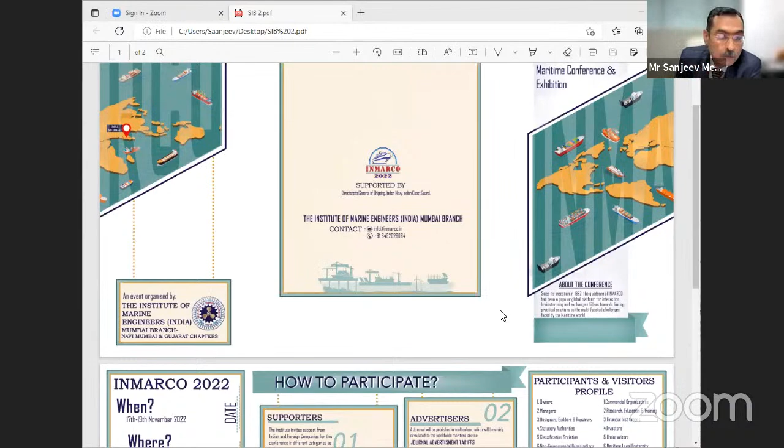INMARCO basically started in 1982. It's a quadrennial event, and it's been a very popular global platform for interactions, brainstorming, and exchange of ideas. This is happening in November, from the 17th to 19th, at Hotel Sahara Star. The theme for the event is Evolving Maritime World for Greener and Sustainable Future.

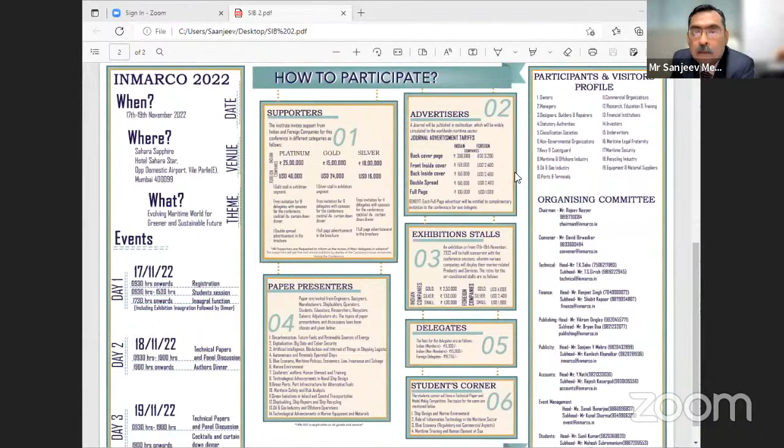Very good evening. We at Kenmark Tech Solutions have a quality policy, and I'll read it out for your benefit. First, to be the preferred service provider of spares, repairs, and overhauls for ships, machinery, power plants, and industry. We endeavor to satisfy the needs and expectations of customers consistently, ensuring regulatory and statutory requirements are fulfilled in all aspects of our service. We will at all times adhere to the quality management system and its requirements, and will monitor and continually improve its effectiveness in all aspects of business.

The important thing is the ship must keep moving. If the ship stalls, the complete related industry will collapse. This is the high point of our Kenmark.

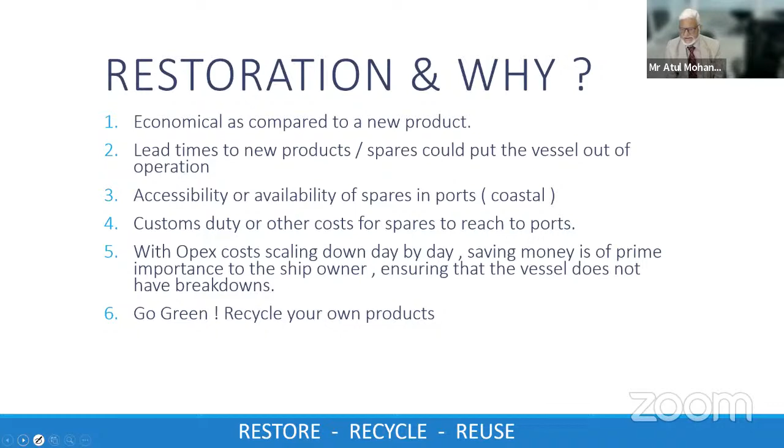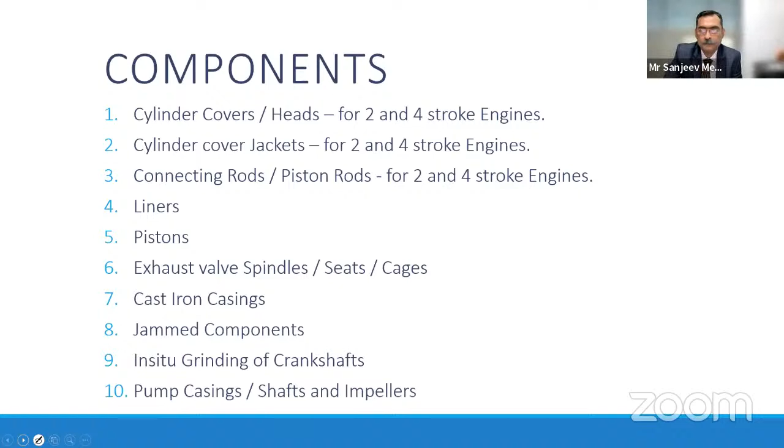These are the type of components we are able to attend to in our workshop: cylinder covers and cylinder heads for both 2 and 4 stroke engines, cylinder cover jackets again for both 2 and 4 stroke engines, connecting rods and piston rods for 2 and 4 stroke engines, liners, pistons, exhaust valve spindles, seats and cages, cast iron casings, and jammed components which we receive quite often in our workshop. We also do in-situ grinding of crankshafts on board ships, pump casings, shafts, and impellers.

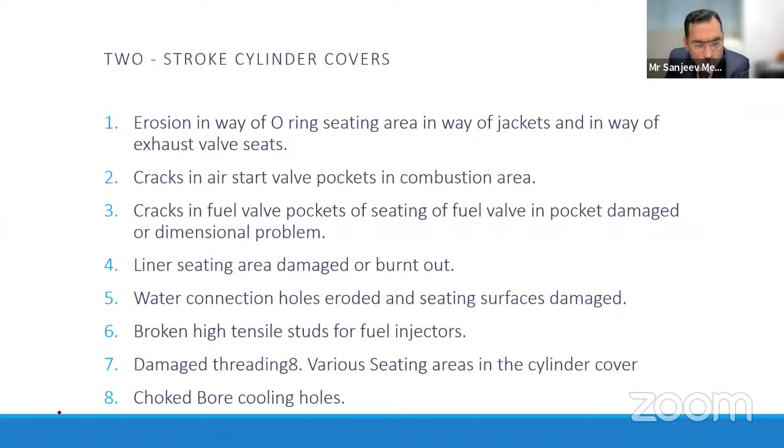So here are some photographs. I will try and take it along of what all we are facing here. So here you can see seating areas are damaged. Here you have damage in the O-ring grooves. This is absolutely worn out here. These are cooling connections, and this is basically your threading holes for the studs.

In the combustion area, you can see where the fuel injector comes out. There's a big crack here. The cladding area, this is a cladding area here which is damaged, which is eroded. This is fuel valve pockets with lot of lapping, lot of emery being used. The sizes get distorted, so you have a lot of problems here, or you have cracks in them.

These are peculiar to Wärtsilä engines. You can see cracks because Wärtsilä has got bore cooling, and a very peculiar problem with these heads. The thickness is in the range of about 20 millimeter, and normally you will have a lot of problems with Wärtsilä cylinder heads. So here you can see we do a regular testing before we send it out to the client. We test the wall thickness, and if it is less than 16 millimeter, for an RTA 52, then we do a complete reconditioning job on this.

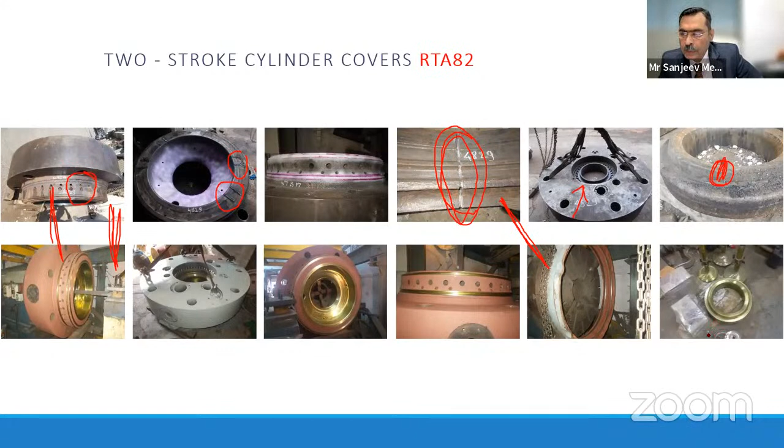The below row is basically the jobs which were finished, before delivery to the client. So this is how you can see before and after photographs. And even we managed to repair the jackets. Normally cracked jackets and jackets in two pieces are difficult to repair. But if you don't have spares and the ship has to move, then you have to do something. So we managed to repair and the vessel sailed out. So that was good, the client was very happy with that. So this is also before and after. You can see the seat on top and after restoration on the bottom side.

So bore cooling is what we spoke about, and you can see here the bores which are badly choked. You can see a lot of rust inside and a lot of scaling inside.

You can see the second photograph here, where people have tried to weld. Obviously, when you're on the ship and you need to run the engine, you need to do something. So people have tried to do weld repairs to try to run the engines, but...

...obviously they don't usually work. On the right side, you'll see a before and after report. This is what we normally give to our clients after the job is done, so he can keep a trail of it in his records.

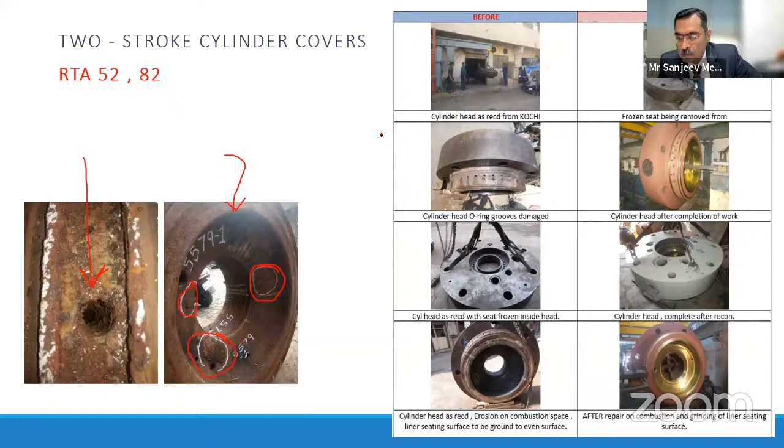Coming to the next one is 4-stroke cylinder heads. We get a lot of 4-stroke cylinder heads, about 150 to 200 of them. The biggest problem we have is point number 1, erosion in way of exhaust seat pockets, normally due to insufficient chemical dosing or bad cooling water.

Then we have liner seating area burnt out, damaged or substantially broken due to overlapping, cracks and leaks in the gas passage. We've seen these cracks in gas passages normally in coastal vessels. No one knows what the reason is.

We've had sister vessels where on one vessel there is no problem as such, but on the other vessel there is a peculiar problem where all 3 engines are having the same problem. So either it's something to do with the cooling system or maybe material failure.

Then you have centerline problems we've seen for seats and valve guides. Very big problem, and this is normally when workshops or ship staff don't take due diligence and due care for maintaining the centerline. If you don't have that, you will have cracked valve seats and broken stems, which can do further damage to your turbochargers and other machinery.

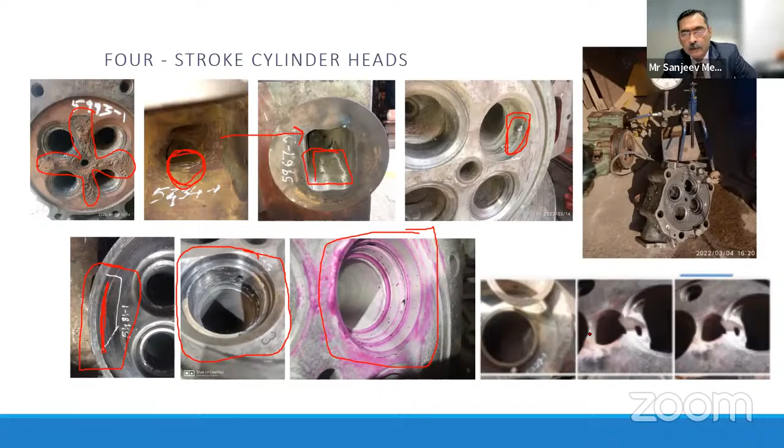We had a case of a very old dredger using a European-made engine. The engine manufacturer stopped production, so the dredger came to India. We got all the cylinder heads for repairs. There was no spare cylinder head, and one of the cylinder heads had a very deep crack.

So we did manage to rectify this cylinder head, and I think it's been over 2 years, it is still under operation. This was something the client was quite happy about, that he could restore the engine back to normal, and it's still in working condition.

This is normal pressure testing of cylinder heads. We normally pressure test the cylinder heads to 8 bars, 10 bars. We normally try to take it to 10 bars just for our safety.

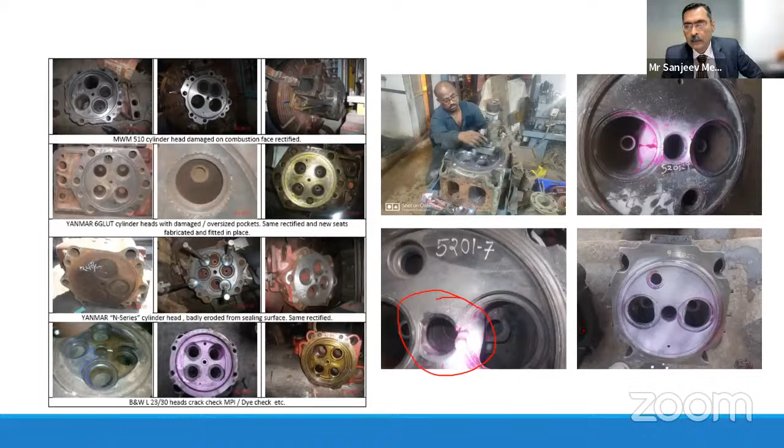So the cylinder head I was talking about previously is this one. You can see here, after build up. There were about, I think, 12 cylinder heads. You can see the cracks here, and you can see the cracks here. This is after repair.

This is basically another cylinder head, but this is after repairs. On the left hand side, you will see different types of repairs that we do.

The first one was the combustion area which was damaged, so that is being rectified here. The second one here is how we received it from the ship. Maybe they tried to put the seat and punch it all around so the seat doesn't come out.

Anyway, we did a rebore and fitted new seats inside. Again here you have problems of seating, liner seating area, and that's what was rectified. The last one here, you can see they had problems on the combustion area, and this is after rectification on the crack check.

We normally use Chris-Marine machines, which are very good for pockets, but it depends, because these machines are okay only for light work. For normal bore work or whatever, then we have to use conventional machines.

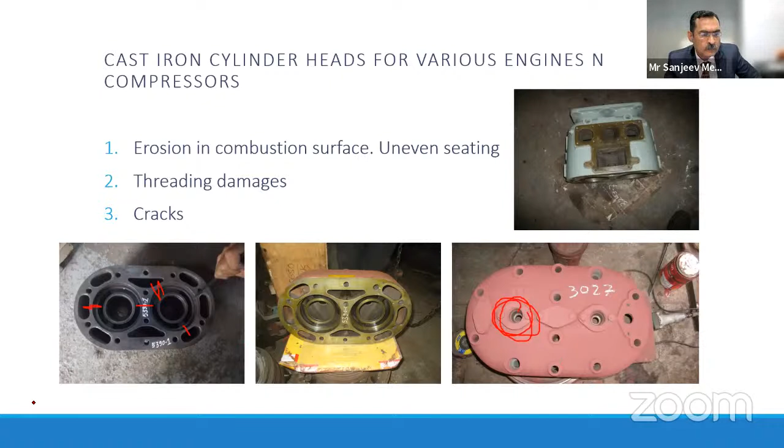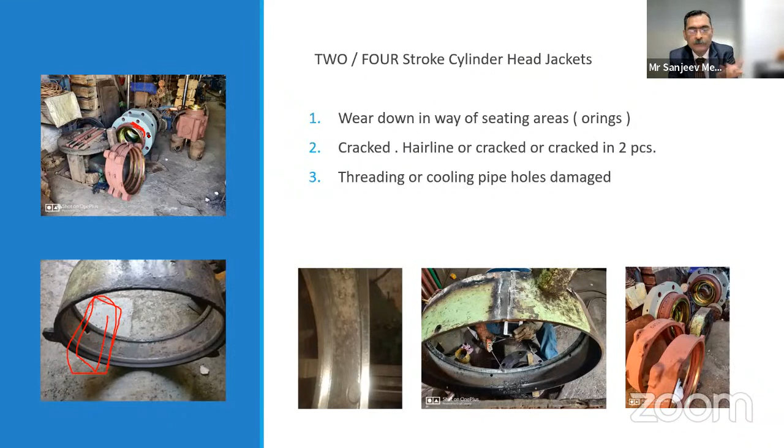Personally I feel those welded jackets were very good, much better than these sliding jackets, because these have not anyhow eased up the situation for the shipowners or the engineer on board. You can't do much about it. You have a lot of problems with cracking, a lot of problems with erosion here, a lot of erosion problems here. And the O-ring doesn't set, so you have leakages from O-rings there.

So there was a reason why the OEMs have shifted to this, but if you ask me, it's more of a mess.

So here we do a lot of work on jackets. We do more than 120, 150 jackets in a year, different types, different versions, different bore sizes that we get. Here you can see a 42 MC. These are the cylinder heads, these are jackets for them, and here you see the exhaust valve cage.

This looks like a 60 MC jacket to me, and this one is a cracked jacket. The owner was doing the coastal run and did not have a spare jacket, so he requested us if we could weld it. So we did the job, and it did run till he got the new spares.

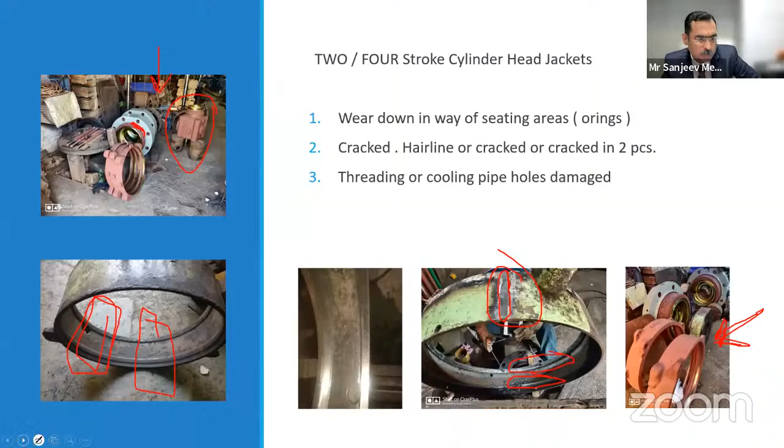Then we'll go on to connecting rods or piston rods. So for two-stroke piston rods, basically ovalating the rods, not much one can do other than you reduce the size and go on to the next undersize. You can also do chrome plating on the rods and bring them to size, that's another way of doing it. Then you have dimensional reduction way down in the rods, that's what we spoke about, ovality and dimensional reduction.

O-ring grooves damage, lube oil holes getting choked - rare, but yes, we have seen one or two. Jammed piston rods in piston crown and skirt, quite a lot, we get a lot of these jobs. Basically, they are not able to open them or remove them on board the vessel, so we have to use a lot of heat, we have to gouge them out sometimes, you have to use presses to get them out.

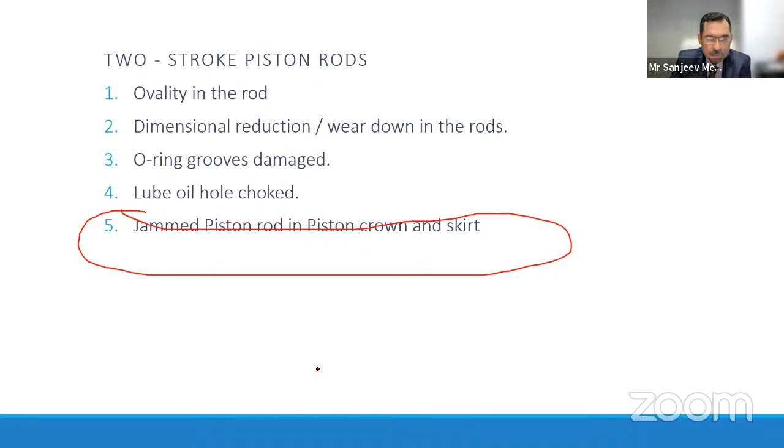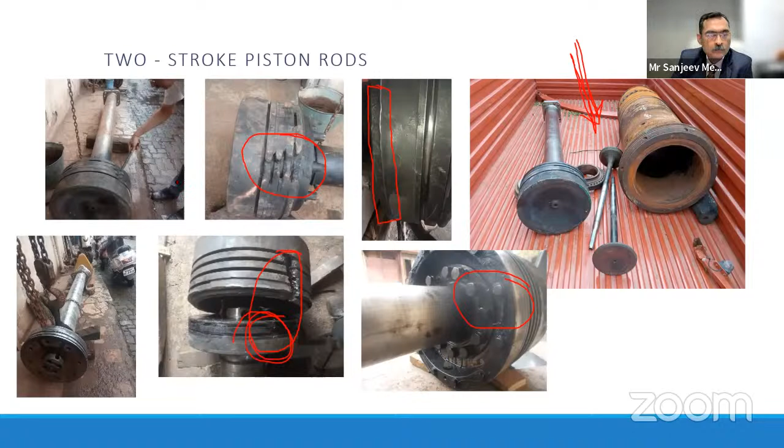We come to 4-stroke connecting rods. So here you have 5 major problems, basically 4 actually. There's ovality in the big end bore, that's the biggest problem that we are facing, that we get in a workshop. Bushes worn down or damaged, threadings damaged, and lube oil holes choked - quite a lot of lube oil holes choked in this one. The biggest problem that we face is ovality in the big end bores.

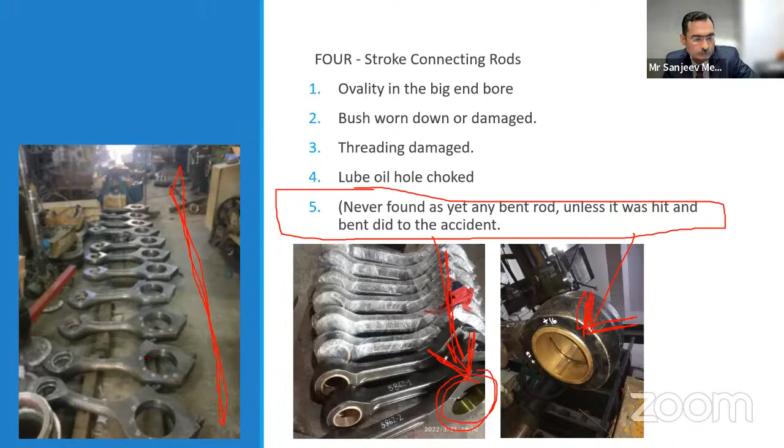Liners. So for four-stroke liners, normally you have ovality problems, burnt out seating areas of cylinder heads, and O-ring grooves damaged. It's quite straight and simple. We do honing on these, enlarges the size a bit, but obviously gives much better lubrication and much better combustion once this is done.

And burnt out seating areas, normally these areas, they get burnt out. So if it's a very minor one and less than 0.1, then we just grind it. If more, then we have to do a build up and then machine it to size.

Two-stroke liners, no one welds them, no one does any repairs. But we've had cases where the vessel is stuck, liners are not available. Carting the liners or air freighting them is way too expensive. And we've gone ahead with the request of the clients to do it.

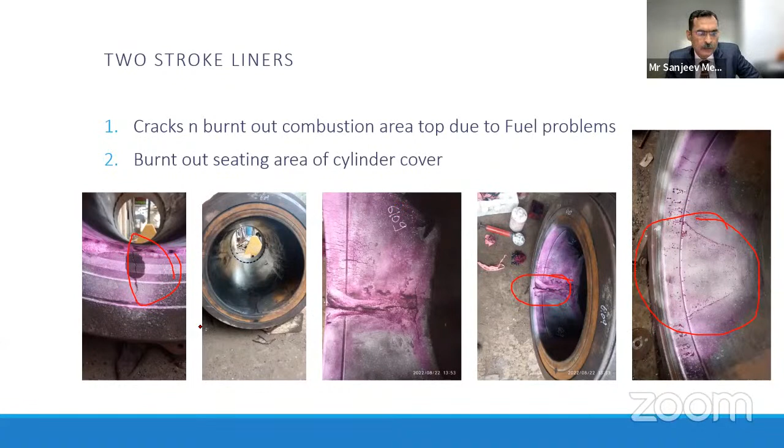We have shipped two liners of 50 MC from China to Panama. The cost of the air freight was more than the cost of the liners. But the vessel was stuck there, they could not move, and they had to get the liners in. So challenges are there, but if someone wants to take a risk, then they do it, and we cooperate as much as we can.

Pistons. So for two-stroke pistons, you have worn down grooves, eroded piston crown tops. Very often you will find the piston crown is eroded, and nowadays we're finding this more and more after changing over to low sulfur fuels. Burnt out pistons, damaged threadings of piston rod and skirt, and lifting holes.

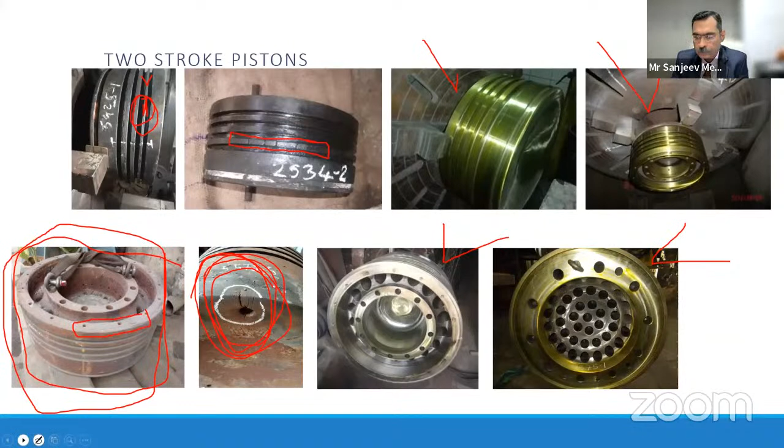Two-stroke piston skirts. Earlier, rubbing band was used a lot. Nowadays they have done away with the rubbing band, and very few models now come with these rubbing bands. Otherwise, you are straight away having cast iron skirts. They're very cheap - when they're worn out, you just throw them away and use new skirts.

So when you see a skirt, people think that it's good, but a lot of people don't measure it. And a skirt is supposed to be a consumable. You are actually supposed to throw away that skirt and use a new skirt. This skirt is a guiding skirt, and people don't pay a lot of attention to this.

A lot of good operators still send us for repairs. So you can see here where we have changed over the rubbing band - we put new rubbing bands here and brought it to size. But very few operators even know what is the reason for a skirt and a rubbing band. If people actually use new skirts, you will have less problems on your pistons and piston rings, because this skirt is actually what is centering your piston.

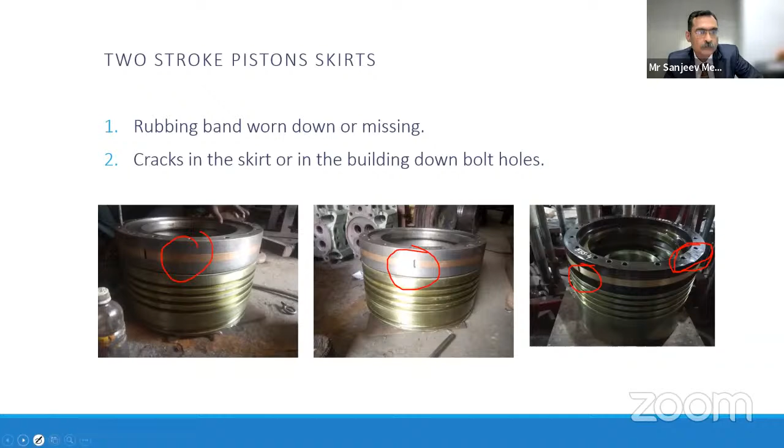Four-stroke pistons, not much that we do. We often get jobs for grooves worn down, and I always recommend people go for oversized rings rather than doing any repair to it. A lot of makers give oversized piston rings, so we can grind them down to the required size and give it to them.

We have done cladding on these piston ring grooves also. Works well - it depends what kind of piston material, the MOC is, and it works well, we've not had complaints regarding that. But again, rather than putting heat onto the piston crowns for the four-stroke, it is better that people grind them and use oversized rings.

Second point is removal of scuffing marks from piston ODs. Quite a lot we see damages on the piston ODs, damage in circlip grooves for holding piston pins, and damage in gudgeon pin bore.

And in the Wärtsilä pistons, you have damage in the chrome plating between the head and the piston body. Wärtsilä has got a very good design for these pistons and they really work well. They have basically a chrome plating on these surfaces, so where they match, and then you top tighten them. It has proved to be a very good design.

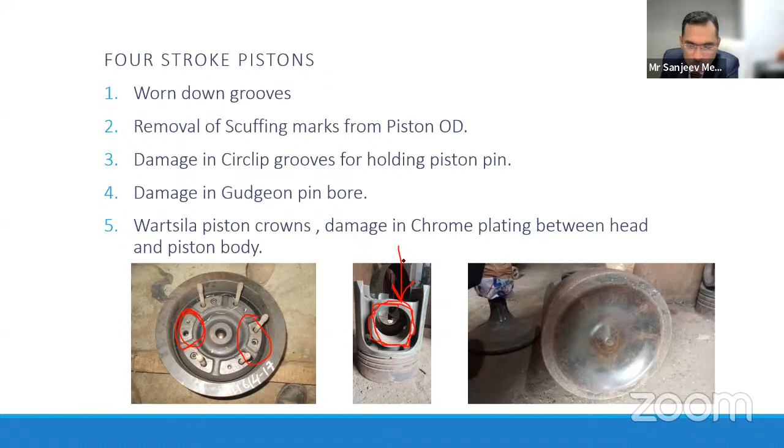Next is exhaust valve spindles and seats and cages.

So here basically for two-stroke exhaust valve spindles, you have eroded material from the lid area, damage in the lid area or normal wear down in the lid area, eroded bottom of the spindle or cracked in the bottom side or OD, and O-ring grooves eroded on the seats or on the cages.

Basically this leads to a lot of leakages and you have water pouring out from the engines. There are dimensional irregularities due to improper drawings, gas passage area in the cages thinned down or cracked, and threading damaged in the cages on the exhaust and water flanges, and spindle guide review.

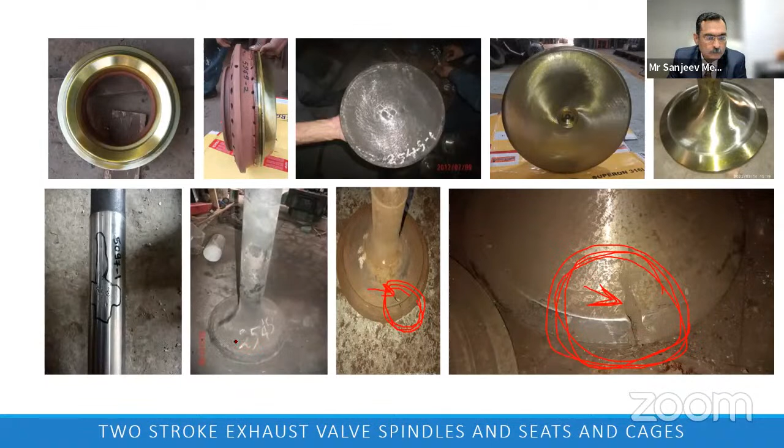You can see another one here. There's a hole through and through right here. This is heavily eroded. You can see the spindle which is heavily eroded here. This is the bottom side of the spindles.

So we go as per the OEM's recommendations. They have given recommendations on how much maximum you can bore.

And this you can see is a chrome plating damage. You can see the problem on the chrome plating here. On the top side, the shining ones are the ones which are completed, reconditioned and ready to be sent to the clients.

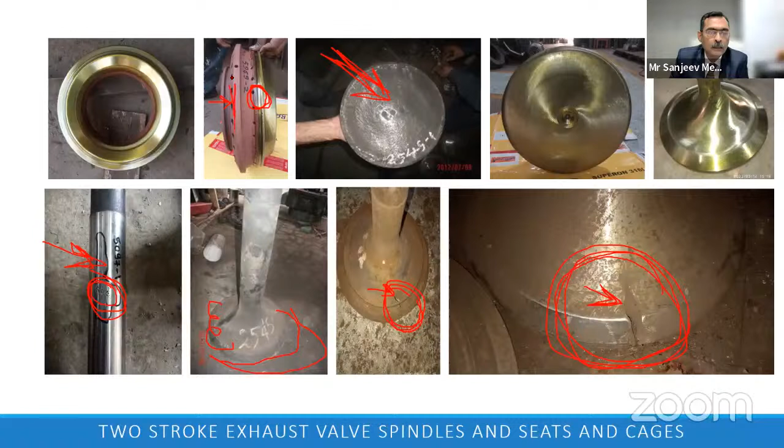So these are the O-ring grooves which you need to look into. This is a UEC, so there is one groove here and then there is one groove here which you can't see in the photograph. So there's one O-ring coming here and one O-ring here. These normally get damaged. I have more examples of this in the future slides, I can show you.

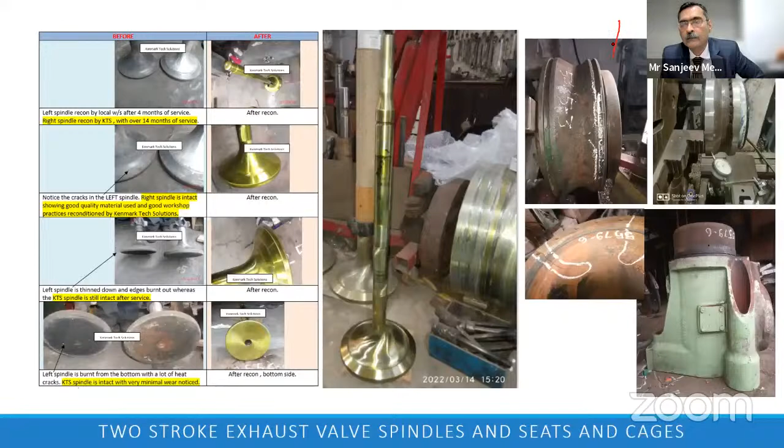So here is another photograph you can see of O-ring groove damage. We build it up here, you can see it, and then we remachine the grooves. That is the only best way of doing it. Part repair doesn't work.

This is an RTA 52 cage, and you can see the cracks here. The cracks were quite deep, so we did the repairs for them.

This is a standard report on the left-hand side that we give to all our clients, before and after. We normally do number punching on all our products, all our components, so we can actually track our components when they're coming back to us.

What we've seen is the components which we receive back, even after 2 or 3 years, are much, much better than the components which are unnumbered or from other workshops. We follow a lot of procedures and use the best of the materials. We do not compromise on our welding materials, because if your bonding is good and your procedures are good, these components will last a long time.

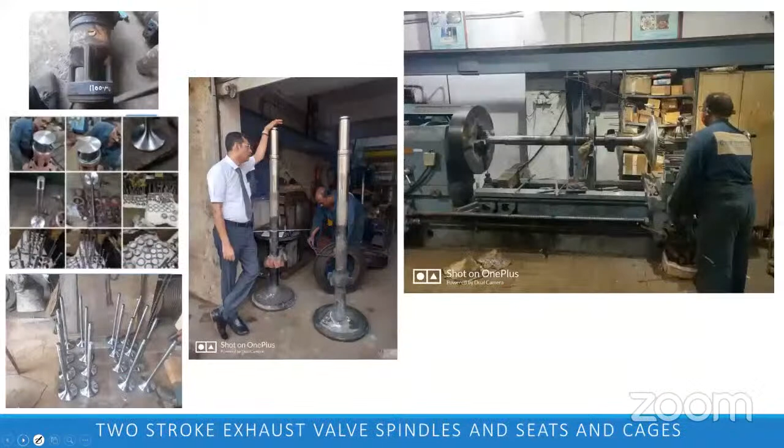So this is the biggest spindle that we have done. That's a 98 MC, what is there in the Indian market, mostly on the container vessels.

We do manufacture spindles, seats and cages. You can see here, these have been manufactured by us and we refit it and we give it to them.

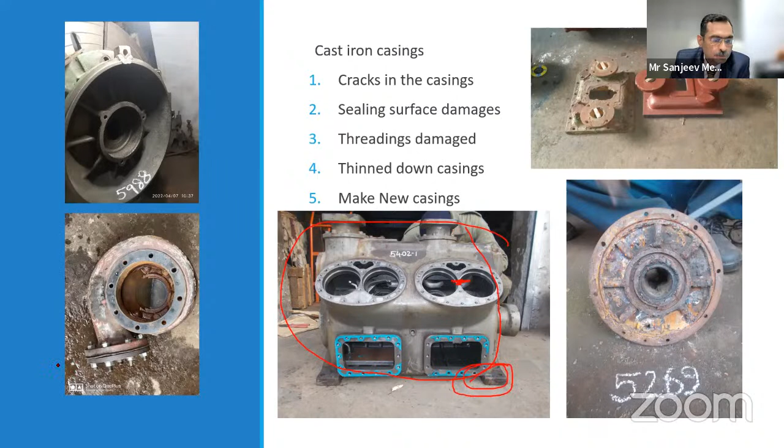Jammed and stuck components. A lot of pumps we receive have got jammed impellers inside. We've spoken about this - seats that get jammed inside, then piston crowns and piston rods getting stuck inside.

In situ grinding of crankshafts. So we can undersize them, we can polish them in place. You don't have to dismantle the engine. We send our people on the ship and we do this work.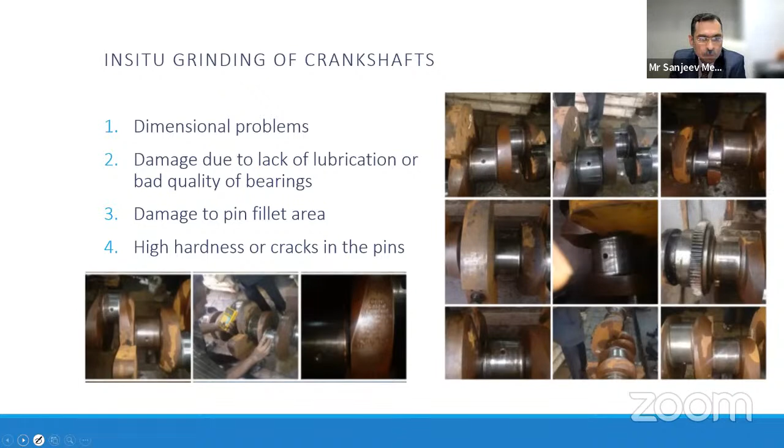This is before and after - these are the huge pump casings that we receive. You put them on the machine and centerline them. It's no point just putting new bearings if you don't centerline them.

This is also a huge pump that we received from a vessel. You can see before and after reports.

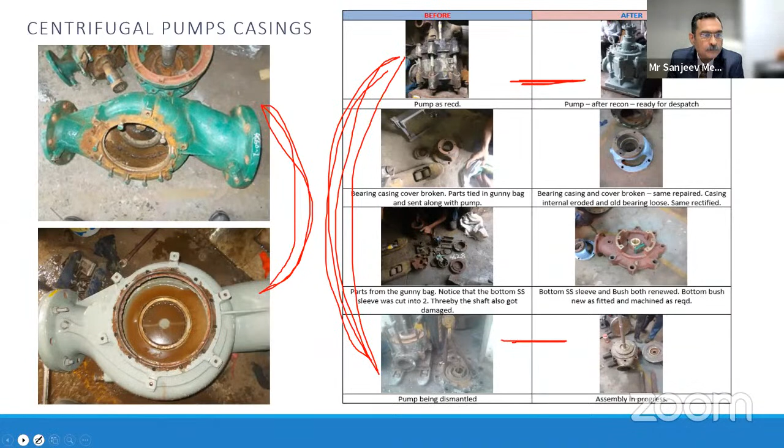More examples of pumps and casings - how we receive and how we centerline them, how we do them. We also use epoxy instead of normal paint, and we do color coding, so when you're down in line in service, you come to know how much is the wear down.

Gear pumps - that's where we specialize. A lot of gear pumps we do - centerline out, wear down of line bushes, damaged casings, damaged faces, relief valve pockets damaged.

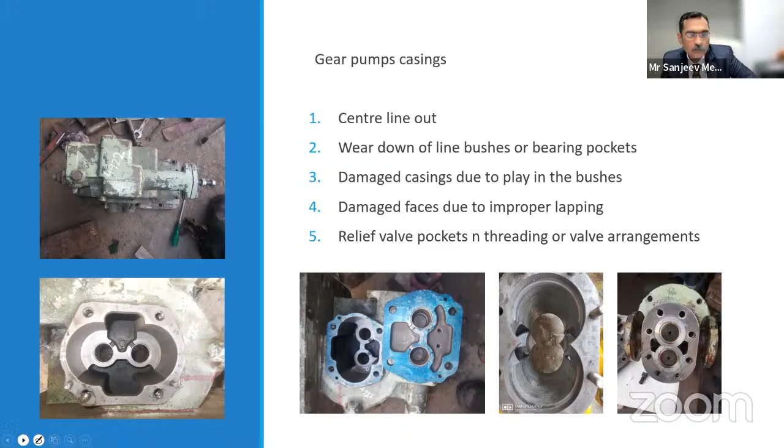So this was a very interesting case that came to us. This vessel was an RTA 58, and the main lube oil pump was damaged. This was built in East Europe, and the company was closed down. Now they could not get a pump which could fit in the engine room with such a compact design.

You can see the pump here - it's so compact. The other pumps, they could not fit because they had to change a lot of pipelines. The owner was so fed up, he wanted to sell off the ship. So we made these casings, we bored them to size, and we delivered to the vessel. That was a good, interesting job.

The owner was quite happy with us for this. You can see here, we are putting the screws in the casings. Various pump shafts - we get a lot of pump shafts to be made.

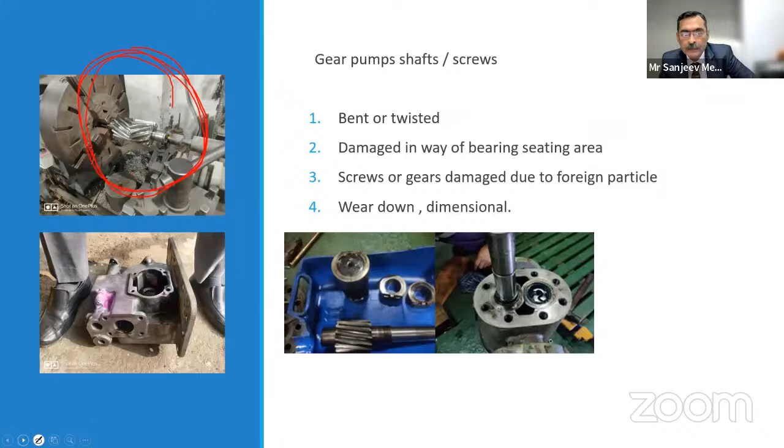Gear pumps and screws. Again, here's a story of a vessel which was stuck in Mumbai anchorage for a month because the delivery period of this gear pump was almost 3 months. So we repaired this shaft and the pump and gave it to them. Took us about 2 to 3 days, but the client was quite happy.

Pump impellers - we remanufacture impellers. We have a lot of patterns with us and we make it as per the client's specifications.

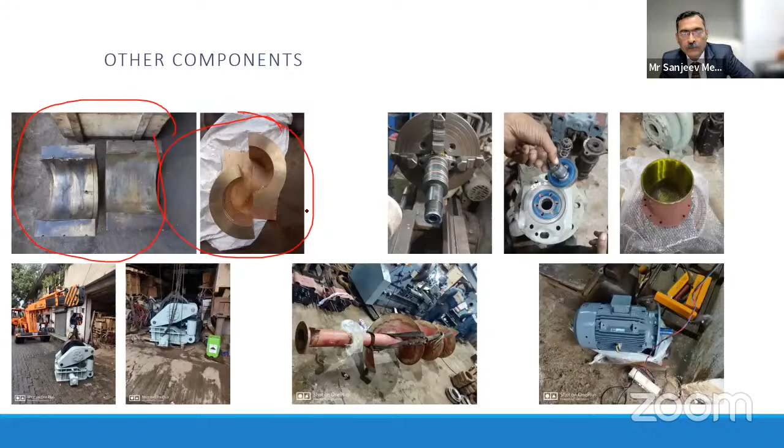These are a lot of other components that we do. You can see bearings - these are line bearings here. Before and after. Fuel injectors - quite a lot of fuel injectors come to us. The surface here gets damaged.

This is a rotary valve for the starting engine. These are air cylinders, electric motors. This is a shaft, a conveyor shaft for a cement carrier vessel. And here you are seeing a crane - this is for an FPSO. These are roller turrets which are fitted on the forward of the ship.

So with this, I finish my presentation and thank you for giving us an opportunity to speak about this subject. Thank you.

Thank you, Mehra sir, and thank you, Raizada sir. It was a real good presentation for any marine engineer. Diesel engine is very close to heart, and practically, except probably the crankcase, all components of the diesel engine have been comprehensively covered. There is a good success story about the repairs of the lube oil pump.

Repairs in situ of crankshaft grinding, etc. are quite significant because they reduce cost as well as improve the time of repairs. He has also highlighted the need to follow SOPs and particularly to avoid fuel impingements, etc. If we follow SOPs, clean fuel and good engineering practices, probably these defects can be minimized.

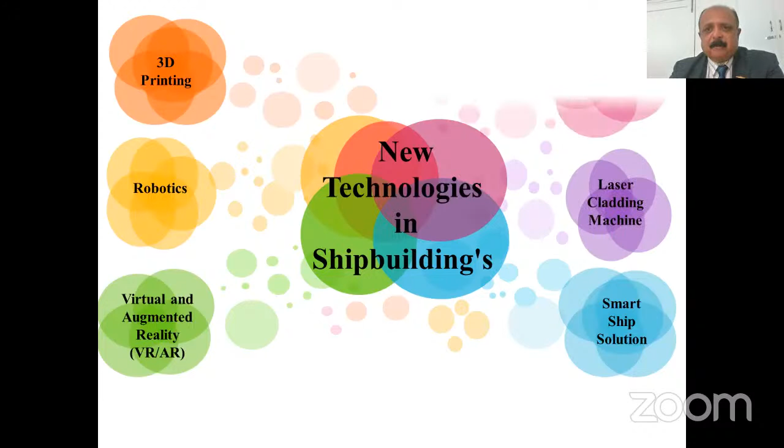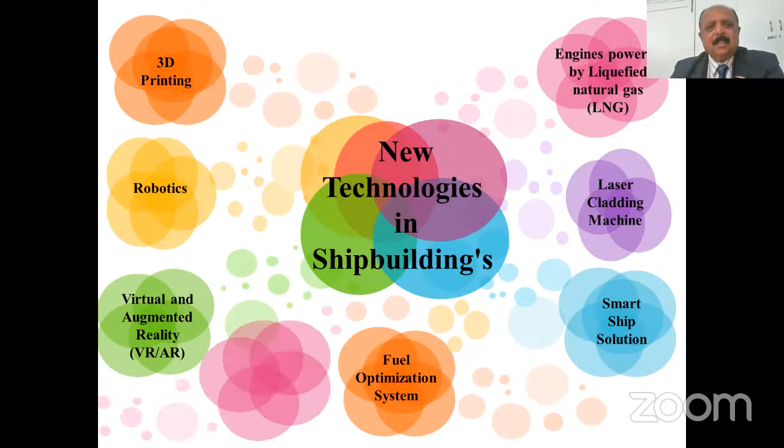And of course, as I go along, I'll be speaking about everything which I am showing on screen, about LNG, of course, because CNG everybody knows, and what is fuel optimization. Because once our people know the basics, then it is easier for them to imbibe. That imbibation is my focus today, that what it is.

So I am addressing, like Togo-san would always say, young engineers. I'll say any youngster who is sitting here - all my panel colleagues, they're highly learned people, they know much beyond all this. I'm very sure when Captain Patnaik will attempt, everybody will have a kind of knowledge and a view which would be par excellence, not known to anyone.

What I am showing, to understand what he is going to show - though I have not seen it, I know him, he has been my senior colleague and my boss, whatever, so I know his level. I will also learn a thing or two from him. Why a thing or two? A lot of things.

So 3D printing is used to create a real object from 3D models. Now how are the 3D models made? They will be made by some design software, CAD, say. Now those 3D printers will create, now it is creating small components, complex geometric shapes. So though we call it a 3D printer, when somebody told me about the 3D printer, I thought it would be something like the laser printer and an inkjet printer which is lying in our offices. But when I came to know what 3D printing is all about - you make 3-dimensional components, small structures - this 3D printing is going to create a 4th industrial revolution.

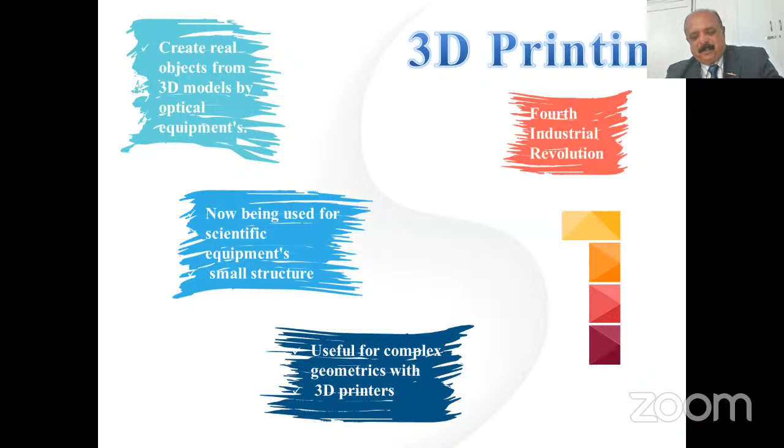We will all see this in our time to come. So this is going to be the basis of manufacturing, right from the design. There is a model, a three-dimensional model, there is an interface, the 3D printing is going on, then there is a component.

We all know what a robot is. We all know a robot is a kind of an arm or a leg or whatever, standalone or a mix of some software controlled equipment which will do some job for you. Now what job for you? It can do welding on the curved area of your ships, it can bring components from one place to another in a fixed amount of time, it can change tools on your machines.

And as the days are passing by, robotics is not a new term, it is an old term. But on an everyday basis, its meaning and its capabilities keep on changing. Now there is something called flexible manufacturing system, so that will be based on more and more versatile robots. Now in shipbuilding there are advances like, with the robotic facility, you can do the cleaning of hulls, inspection of pipes, so many automated processes.

In my yard, we have all the robotic welding machines, and the way they would move in the channels, in the rails, on the curved areas, on the flat areas, it used to be a treat to watch. It used to be an art just to see how the beautiful weld is taking place over 30 meters, you can say by 30 meters on the horizontal line, even up to 50 meters.

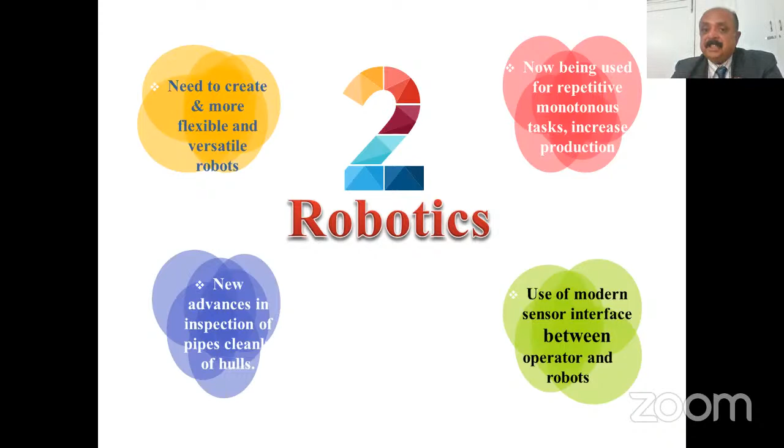So the long monotonous tasks which the manpower is doing - man gets bored, man's hand is not steady. Yes, you can have a lot of automated systems. When it is coupled with robotics, the whole meaning changes. Nowadays there are modern sensors between the operator and the robot. The robot is as intelligent as a man. This man is controlling more than one machine, and that machine is a robot. I mean, needless to say, what kind of efficiency and what kind of quality is possible to achieve with the advancement in robotics.

This one is about virtual reality. At this particular time, we are using virtual reality and augmented reality. It is being used for training and part positioning.

If I want to tell you in a very simple form, augmented means enhanced. It is connected with the real world with the virtual. What is virtual? Which is not there, but it gives you a feel it is there. Data is extracted from a virtual system, and with augmented reality, it places it where it is required to be. That's all. Other applications you can see on my right-hand side of the screen.

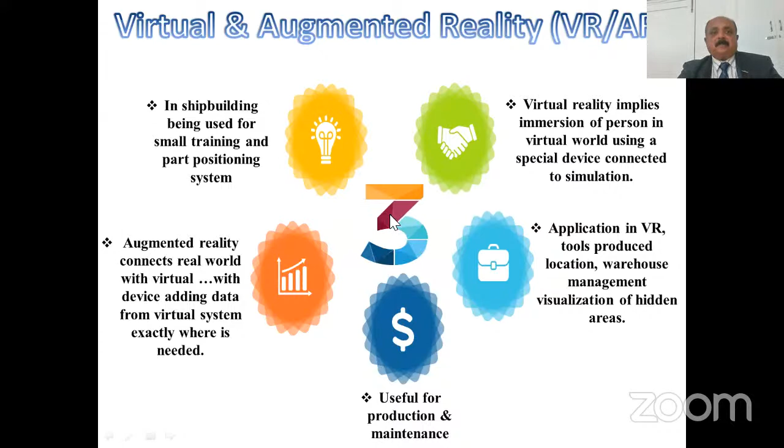Now this is interesting. Very interesting. Liquefied natural gas, environment friendly, everybody knows. It reduces emission by 92%, and 20 to 25% vis-a-vis diesel engine, that is about CO2. And there are major players: Mitsubishi, Wärtsilä, Rolls-Royce, MAN.

I mean, everybody has to develop engines which are, the dependence from diesel, from petroleum products, it has to be weaned away in the times to come, because more and more of green energy, more and more of efficiency, more and more of advancement and harnessing the capability of engine, which is being done on an everyday basis, and that is the future.

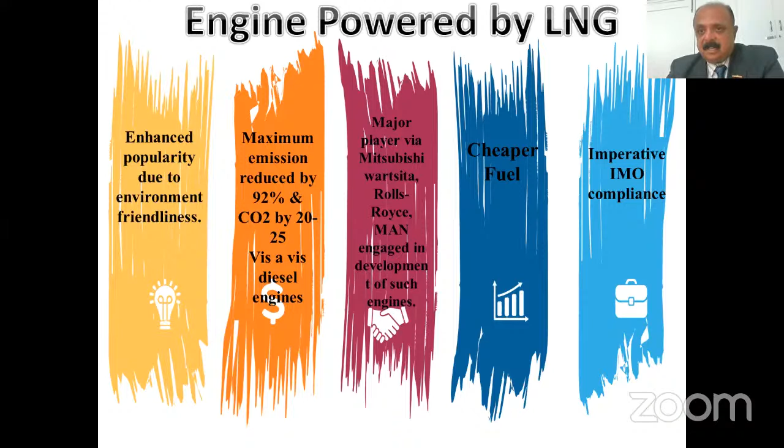And IMO also, they have put such a big restriction that we have no choice but to turn to this. I think everybody knows there is a huge agreement between India and USA to transport LNG from there to India. The challenge was to make those LNG carriers, because the government of India put a restriction that at least some number should be built in this country, and rightly so. And that fuel is going to be a much cheaper fuel.

So next in line is about cladding. Cladding, what is cladding? Dhakna, coat karna. No, here I'm talking about steel or stainless steel piston tools.

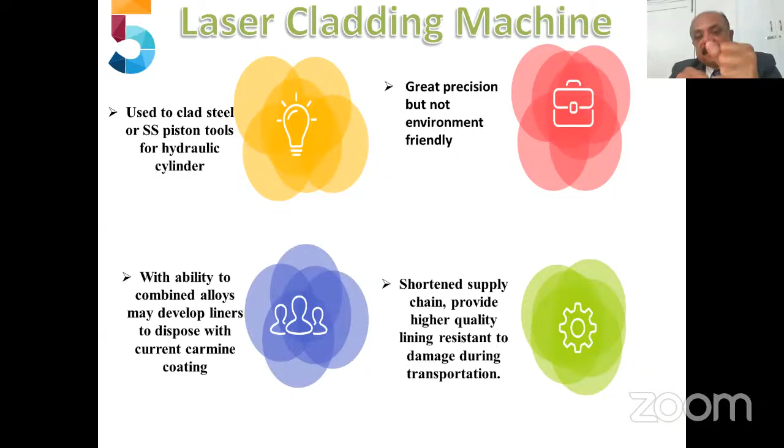Great. It's very, how do I say, it's got the ability to combine alloys, we can develop liners with this technology. It's got a shortened supply chain, because they'll be easy to carry, and there will not be any resistance or damage during the transportation.

This again, this security. Now, when we talk about modern technologies, the technologies will remain the same even for warship or for merchant vessels. Its application, its advancement, and its particular use will differ from platform to platform.

Right now, we all know there is a big integration all over through the internet, through the cyberspace, and cyberspace has been invaded either ethically or non-ethically. Just to tell you, just 5 days ago I got some scamster calls, and they are demanding some money, trying to blackmail you. Nothing is safe. Your mobile is not safe. Your laptop is not safe. Your vessels are not safe unless and until we take proper precautions.

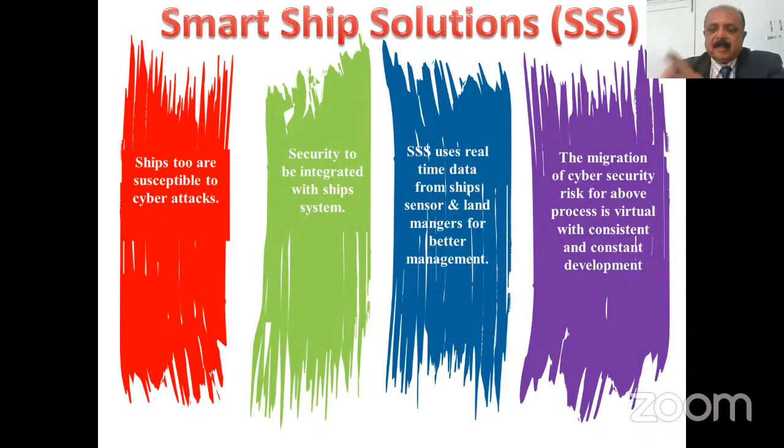Fuel optimization system, it's beautiful. My student asked this: sir, you are talking about LNG, CNG, and you also say that ships are 20 years old, 15 years old. How will they, what do you think, keep on incurring cost? How will the ship owner ensure that he is not running into losses, even with the older ships? That was a very good question. Since I knew the answer, it is in front of you on the screen.

This system will track, measure, and display the behavior of what your fuel is doing. And those system monitors give you recommendations for optimizing and reduction of emission by say 12%, for maximum diesel. They say that this particular system may be better than the liquefied natural gas option. And if we need to use this, it should be installed at the time of shipbuilding so that proper engineering is the base of this.

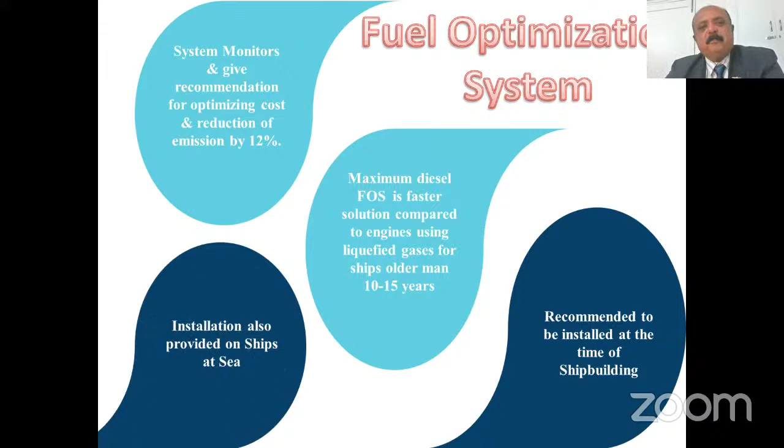So, installation is also provided on ships at sea. Everybody knows this, my senior colleagues. This is beautiful. Now, this material.

This particular material is being used in the aircraft industry already, though not very extensively. It is a sheet, you can say, called carbon nanotubes. It is 50,000 times thinner than a hair. These sheets are one tenth the weight of steel, but 5,000 times stronger.

Needless to say, what will happen to the weight of the ship? We will have much lighter and stronger vessels. It conducts electricity in a very efficient fashion, like it conducts in silicon, and it scatters heat like steel. That's from the net, I got this sentence. And wherever this material is used as a cover, it is also fire resistant, giving better fuel efficiency and safety. When 5 to 10 years down the line, the use of this material becomes more extensive, we can see where we will be.

I do not know why they call it electrical propulsion. I tell you, as a submariner, they say gas turbine will generate power, and the power will in turn run motors. Fair enough. When I was a young lieutenant, when I joined Navy in 1984-85, after completion of my training, I joined submarines, Foxtrot submarines. At that time diesel engines used to be the prime movers for power, and the electric motors would directly run the submarine. Nowadays, the batteries are charged first, then the electric motor is run through those batteries.

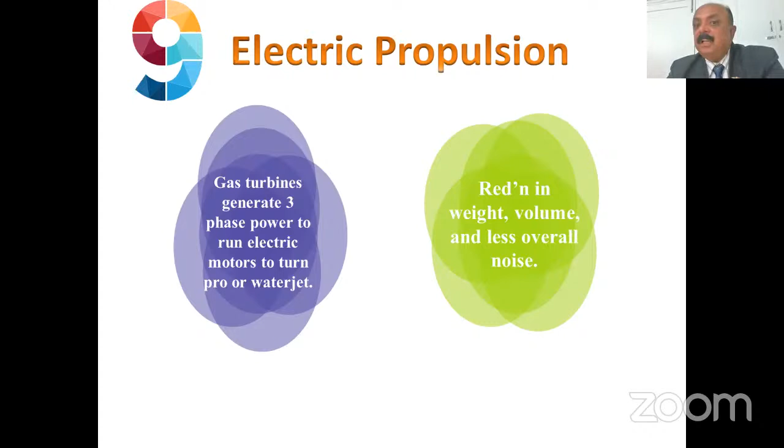But here, there used to be an arrangement with clutches. Beautiful. Either you can charge the battery or you can have direct propulsion. So electric propulsion is not something new. The prime mover, the gas turbine concept, this will be used in the future electric propulsion. It will mean reduction of weight, volume, less overall noise, but nobody is talking about the expense.

It's going to be very, very expensive. There is always a discussion between electrical and mechanical engineers. Somehow the name has come to be electrical propulsion. Fair enough, propulsion is propulsion. Howsoever you may do it, but that is the technology of the future. It is much more efficient, much more cleaner.

AI, I don't have to say much. Artificial intelligence systems - your machines will work with that. Your maintenance management will be controlled with the artificial intelligence system. That's all I wish to say about it.

Now, IoT - this is a term which I learned very recently, just a couple of years ago. Internet of Things. This course is being offered by maximum students now. Lot of books are coming on this Internet of Things. It is a trend not only in shipping, but everywhere.

Here, the physical devices or sensors share the data with a website. Broadly speaking, that's it. You can use this information for anything - for design, for manufacturing, for planning, the way you wish. IoT is here to stay. That's the bottom line.

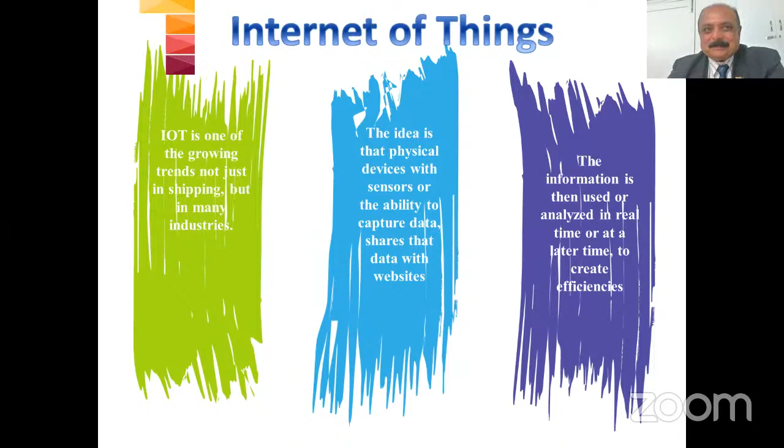Now, this is very dear to me. As an engineer, about the ship's design and about the ship's construction, I never knew, like I already told you in the beginning. And immediately we were exposed to the technology that the block has to be fully fitted. How? There the role of design comes into play.

You are going to cut steel on the day of steel cutting. The first square that you cut out of that steel plate, 5 pipes are going to go through that - fuel pipe, water pipe, this pipe, that pipe. Now, how will you conceive where this part is going to get fitted, how the pipe will go inside? So that is the outfitting and design.

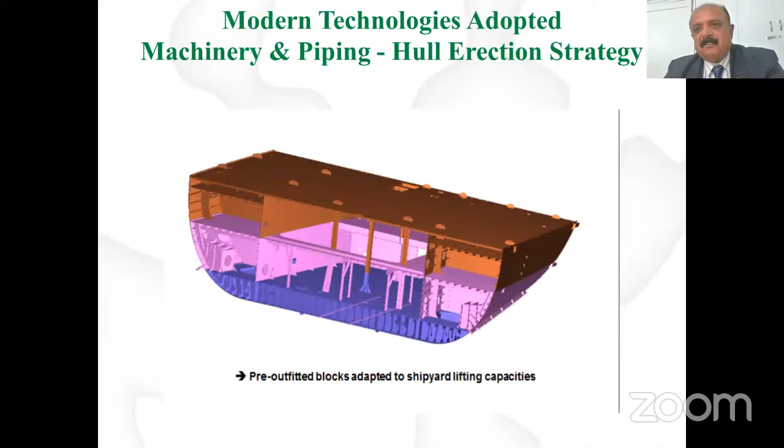Okay, I'll say the design of blocks, the pre-outfitted blocks. Now, in accordance with your shipyard's ship lifting capacity - the place where I worked, the block lifting capacity was 1,200 tons, with 2 Goliath cranes of 600 tons each, 150 meters span, and a hook height of 75 meters. One Goliath recently fell down in a storm, but that is the capability.

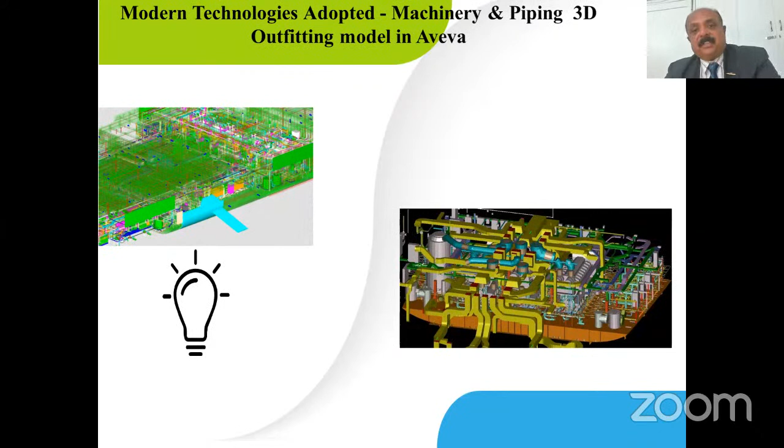Now these are the actual design models which were used to create this. Now, if you have this kind of facility in front of you, why would there be any issue? There is no reason why you will not have very, very efficient production mechanisms, very efficient production capability, and very rare rework.

Then it is about the infrastructure - what infrastructure you want to put in. The things are available, like I told you, everything is available. Then it depends on the decision makers - how to, and what to buy, how much to buy.

And I want to make a very bold statement here that none of these so-called ERP systems is successful in production planning. They are very good in store and supply chain and all that, but on production planning, till now, right from Mars to SAP and all that, there is no good production planning system.

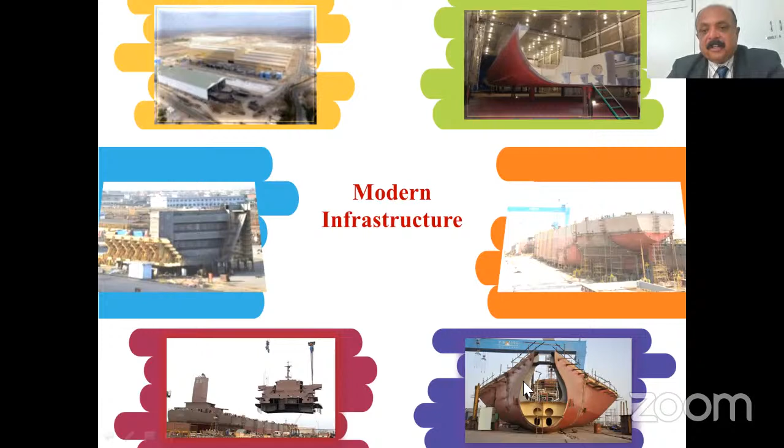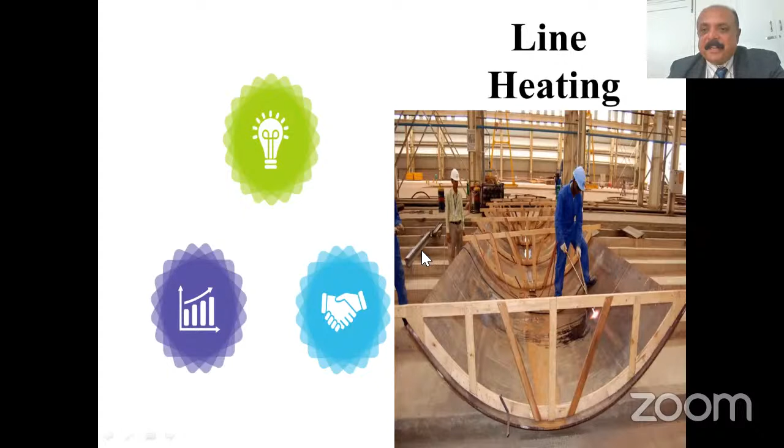You can see the fully outfitted block here. Now this process I show to everyone because it's very dear to me - it is called line heating. Line heating - only with heating and cooling, you get complex curved shapes. I could not get a picture of a much more complex curved shape, but this is the one I'm showing you. When the Japanese trained us in this particular process, they trained the manpower. All 24 people who were trained to do this were poached by the sister shipyard, some other competitor shipyard. They could not work for more than 7 days with the same manpower because ultimately it was designed where to draw a line, from where you are going to heat and cool.

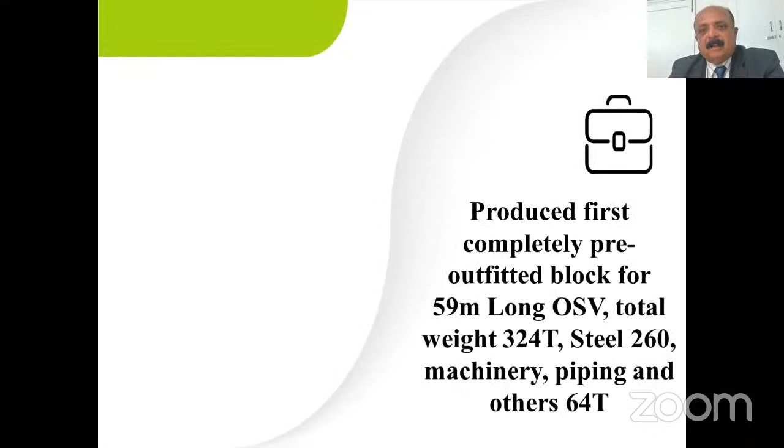This is one picture of a completely pre-outfitted block, 59 meters long - this was for an OSV - and it weighed 324 tons. You see the marvel of engineering.

Due to some reason, in the 3rd or 4th Panamax, there were some time overruns. So with one company, we had a tie-up. This portion, called the green zone, which is the aft of the ship and has the engine room, accommodation and everything, that was built by the yard. And the other gray zone, 10,000 tons, that was built by some other yard.

Avikshit, may I come in? Yes, sir, about 5 minutes please. Yes sir, 2 minutes, thank you.

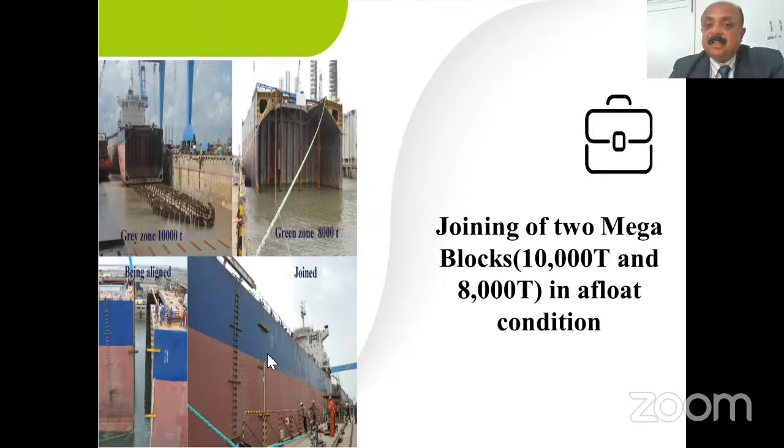That's it, sir. They were aligned in afloat condition and joined - 2 mega blocks of 10,000 ton and 8,000 ton, they were joined together.

Talverkar sir, I always admired you, and today I am admiring you for your timing, sir. You knew when to - thank you so much, sir. Thank you so much, that's it.

Well, thanks a lot, Avikshit. It was a really good presentation. It reminded me of my days when I spent some time at the shipbuilding center in Visakhapatnam. Certain facilities like modular construction, laser survey, using 3D modeling for making even pipes before the outfitting, etc. - certain things were used and they had a tremendous impact in reducing the rework.

Your presentation was excellent. You covered a variety of areas where the technology can help in improving the shipbuilding life cycle. Certain aspects you brought out, like Bucky papers, I think these are going to be revolutionary concepts, and they would have a significant impact on shipbuilding. And so goes that line heating concept. Frankly speaking, it was an eye-opener for me. And if such things are really used properly in India, it will be good for us.

Generally, we have been taking years for ship construction. And if these technologies are used, we should be able to compete with South Korea, China, or the world leaders in shipbuilding. So sincere thanks, Avikshit.

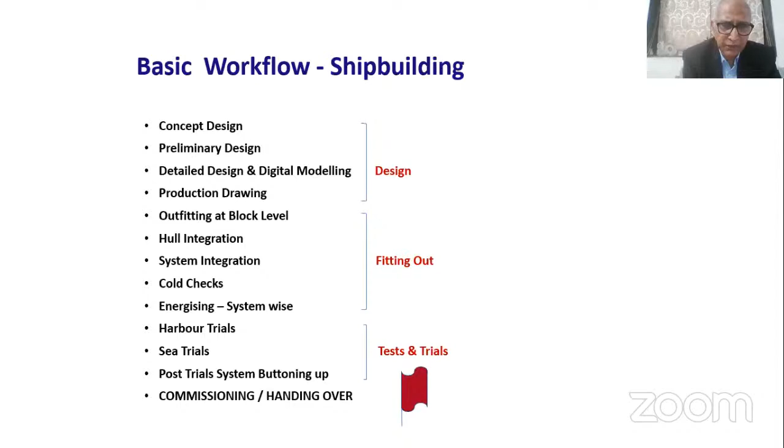We start with our preliminary design and go into detail engineering, which is the basic heart of any design center. I've given as an example, you can use Napa and MaxSurf. There are several other design softwares available, which need to be utilized when doing detail engineering, like PipeNet, and Avikshit did mention Cadwin, Nastran, ANSYS, and so on.

So once you do a detailed design, then you get into 3D modeling. I've put CATIA V5 as a demonstrative software. You can go in for CATIA V5, or Nupas Cadmatic, or AVEVA Marine, or Tribon, whichever software suits you for shipbuilding.

You can use it to put all your design aspects, all your components, sub-assemblies and assemblies into a 3D model, wherein you do a proper analysis of the interferences involved. You take a rule-based approach, wherein you freeze the model in a certain form.

Thereafter you present it to the customer through a virtual reality scenario. This is a very important aspect, where you need to take the customer along with you, take customer feedback on various aspects, tactical, operational, and so on, which I will come to shortly, and freeze your 3D model, lest you land up in rework later on when modifications are suggested by the customer.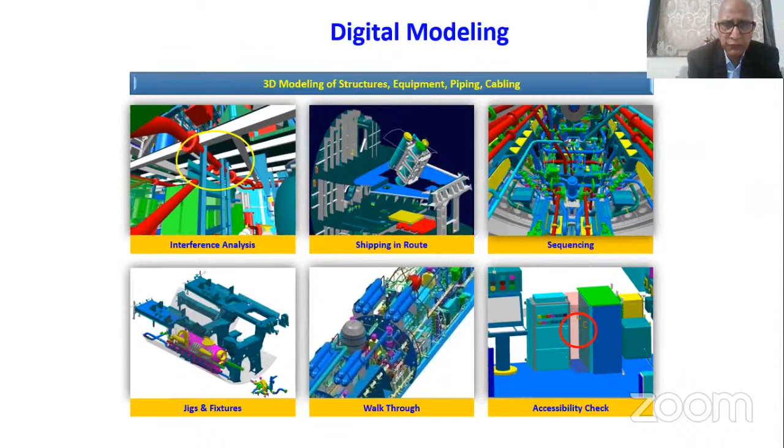So these are a couple of salient features I have envisaged, which will come out of 3D modeling. And 3D modeling necessarily has to be rule-based. For example, the gap between a hot pipe and a cold pipe should not be anything less than 200 millimeters. If it is less than 200 millimeters, it flags that there is going to be remodeling. At the modeling stage itself, you follow the rules and position your pipes accordingly.

The second slide shown here is the distance between your cables and vibrant pipes, which should not be less than 50 millimeters. If it is less than 50 millimeters while doing modeling, then you have a problem. So that's why at the modeling stage, you follow the rules and do the modeling within a given space.

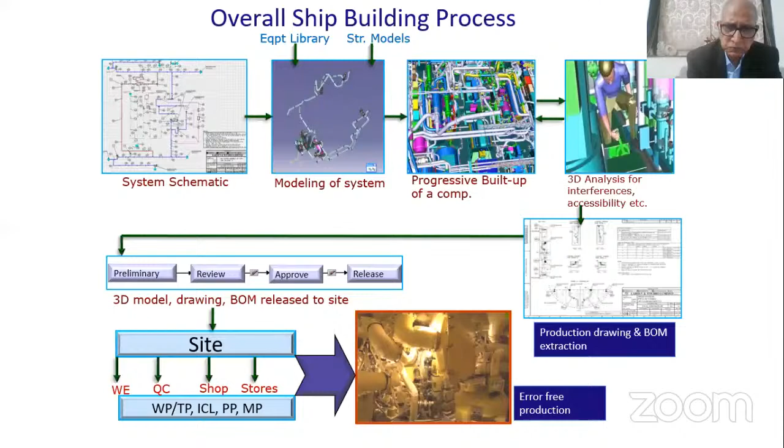For a total digital solution, from basic design, go to modular design, thereafter 3D modeling through CATIA or any other software equivalent to CATIA, Tribon, etc., then VPLM and the PLM. PLM will have two components.

One is the project management, where you need to see the progress of the project. You can use Concerto as a software, or Primavera, or MS Project, anything you need to do. But yes, project management is a must.

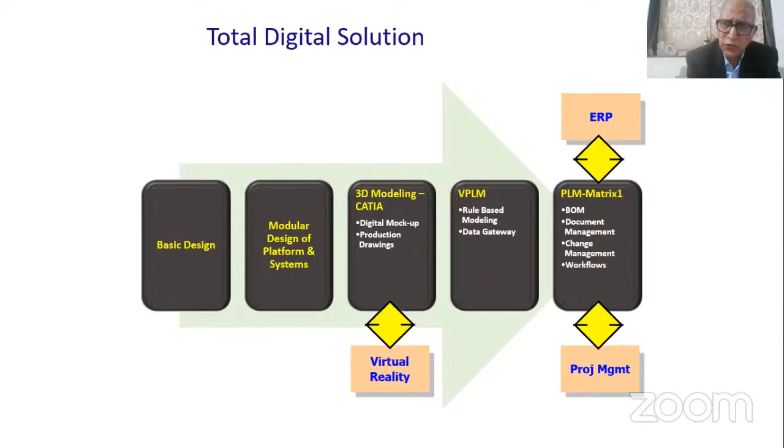And enterprise resource planning, particularly for your material which is flowing in. Most shipyards use Baan, but any other software could be used for addressing your ERP issues.

From the 3D model basket, you can go in for equipment installation through a proper design of jigs and fixtures. You can go for pull out pipe isometrics, which can be directly fed into a CNC machine, and you get the pipe spools for installation.

Similarly, you can get your type of cables and the length of the cables and the routing details for cable laying, because any ship construction equipment, etc., normally gets addressed properly—major, medium, and minor equipments.

Where you get stuck is when you lay out pipes, cables, and trunkings. That is where you have clashes. Therefore, you have to have a seamless integration of design and engineering with production.

I was mentioning to you about virtual reality. You have to take customers' feedback as far as the design is concerned, option analysis is concerned, system integration is concerned, maintenance envelopes are concerned, tactical and mission rehearsals are concerned, operational analysis. So for all these features, you have to have a proper sitting with the professionals belonging to the customer sector, and their feedback is very important when it comes to final freezing of the 3D model.

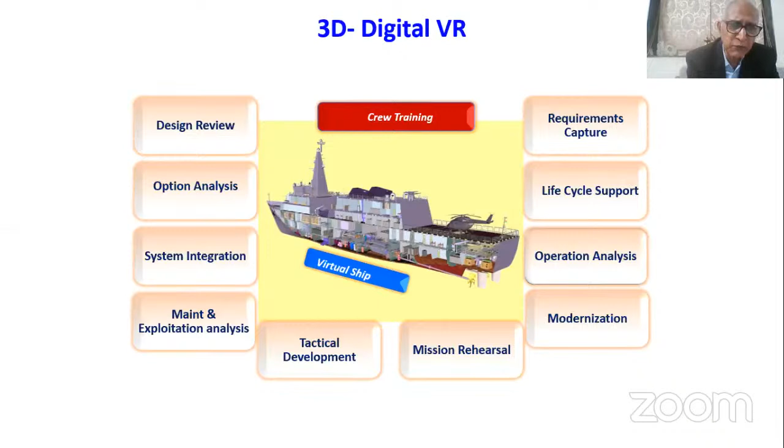Without this virtual reality—what even Abhishek was mentioning—VR and AR is a very, very significant component in shipbuilding. Though it is a little expensive, but once you have this particular tool, it makes your life much simpler in terms of reducing very heavily on your rework.

Now come to modular construction. I have just given a picture to understand the thing. I have broken down the entire ship into 3 sections: the forward section, the mid section, and the aft section. Depending upon the kind of ships you are building, let's say you are building an LPD, it will have probably 27 blocks. I have just figuratively given 3 blocks, but each block, once you configure, that means you build it anywhere.

This concept is that suppose you have one mother shipyard and you have 3, 4, 5 ancillary shipyards around you. You can take these blocks and build them at any of those ancillary shipyards and then bring them to the mother shipyard for assembly. So build anywhere and assemble at a given particular place will be the concept, but your design will have to adhere to the blocks you are building.

And here there are distinct advantages. Naturally, you will have a parallel construction, thereby your entire cycle time gets compressed, and each block has its own identity. It's backed by its sound design, it's backed by its own 3D model, and you build the block and bring the block in, and then join the sections to make the vessel.

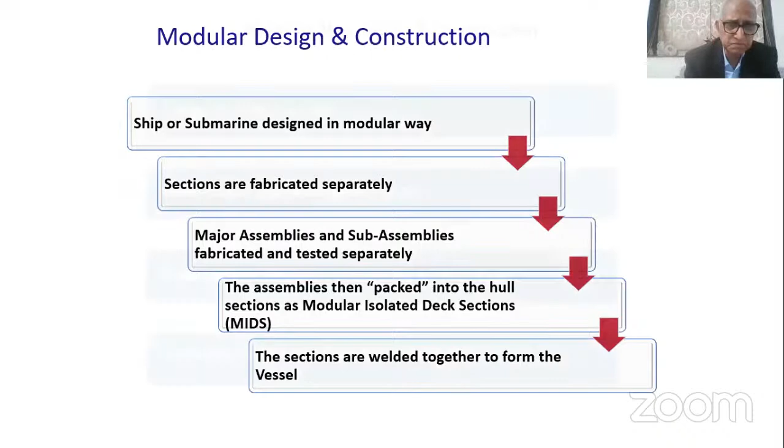The basic point is that the design, the way it is built, and everything now is centered around PLM, that is product lifecycle management. Our goal should be to build the right product and build the product right. Obviously it's a big challenge to do everything first time right. Therefore, we need to adopt not only digital mockups, but also mockups outside the vessel, so that your fitment or weldment on board becomes almost flawless. I won't say zero errors, but rework gets minimized. Therefore, a lot of emphasis is required on mockups. And this will give rise finally to digital manufacture, which is totally PLM based.

Three mantras for basic usage are OMA, that is operability. You should be able to operate a particular valve or pump easily in a given compartment. You should have a sufficient maintenance envelope, so that should there be a maintenance requirement on board, you have sufficient space to maintain those equipments or components. Thirdly, you should have accessibility to operate those equipments. Sometimes we overlook this, but at the design stage, once OMA is taken care of, the amount of rework required gets minimized.

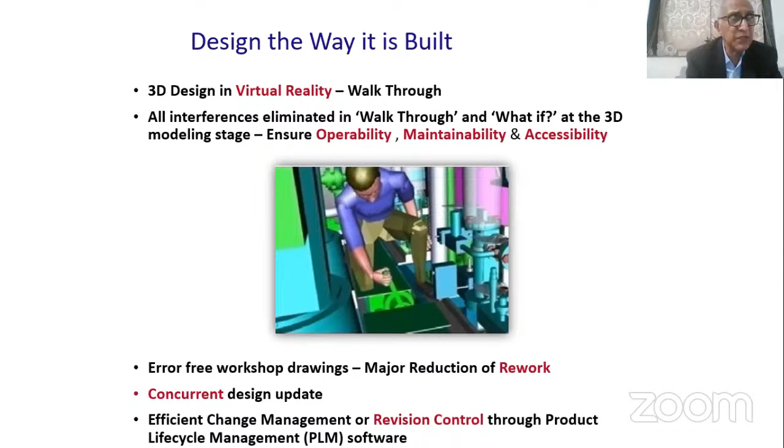Through PLM, you have concurrent design and revision control. More often than not, what happens is you get an R1 or R2 when you are halfway down production and R3 flows in. That is a disaster. So we have to ensure latest drawings are available on the shop floor, and therefore a very sound revision control of the drawings is required. That is where PLM really helps you have proper revision control and concurrent engineering.

So the entire integrated digital environment we are creating here would only ensure the right product is built with the right bill of material, the right quality standards, and right system level requirements. That is the final aim of the entire exercise I was trying to explain to you.

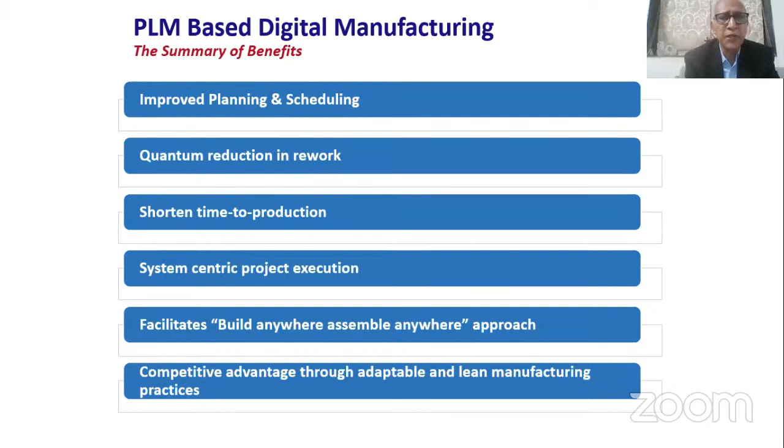On PLM, I think it's just a slide. PLM actually improves the planning and scheduling. It definitely substantially reduces the quantum of rework and shortens the time to production. It always has a system-centric approach, and thereby you can adopt the principle of build anywhere and assemble anywhere. All this normally gives a competitive advantage when you have a lean manufacturing practice.

When it comes to ship repair, a quick one - I think we crossed 8:30, another about 3 minutes I will take. On ship repair, the workflow is known to most of us. Sir, you can continue, sir. We are enjoying your presentation. There is no problem, you can continue.

Okay, right. So on the ship repair front, we need to do a thorough defect analysis. I'm only stressing on points which by and large we take for granted, with a 'we'll see later' type of attitude. But ship repair is basically a murky game. If you are careful in the beginning, it becomes smooth sailing later on. So when you do a defect analysis on hull, engineering, electrical, and W&S, that is weapons and sensors, on both aspects - afloat condition as well as underwater and dry dock conditions - this analysis is important, and this will give rise to your spare parts requirement.

So spare parts identification and spare parts aggregation is the heart of the entire ship repair process. Mr. Rajada and his colleague were mentioning how difficult it is to recondition the entire things. And when you do not have spare parts, barring the cost part, it is a very, very difficult process. Therefore spare part availability at the right time for the ship is very important. Be it a material organization or the OEM, spare part identification is a task by itself.

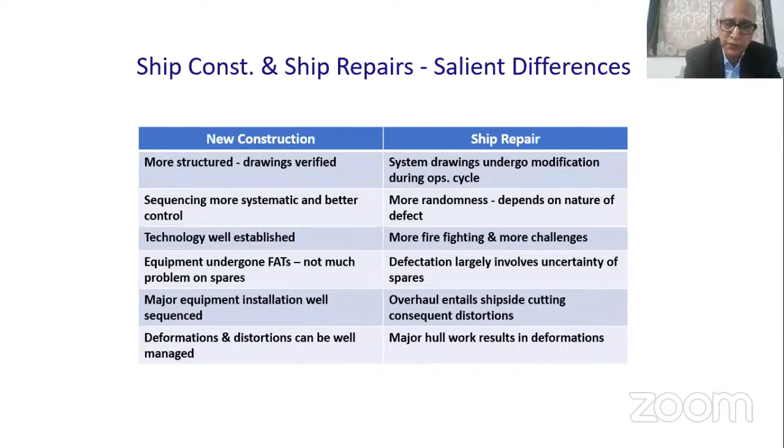There may be many more challenges, but accuracy of digital prints is very important. If you do not have a proper digital print of a particular compartment where you are doing defectation, you will run into problems—definitely when it comes to dismantling and reinstallation. Therefore, it is better that you scan the compartment through laser scanning; you have a Faro, etc. Normally it is recommended that shipyards undertaking ship repair should have a facility for digital scanning like this.

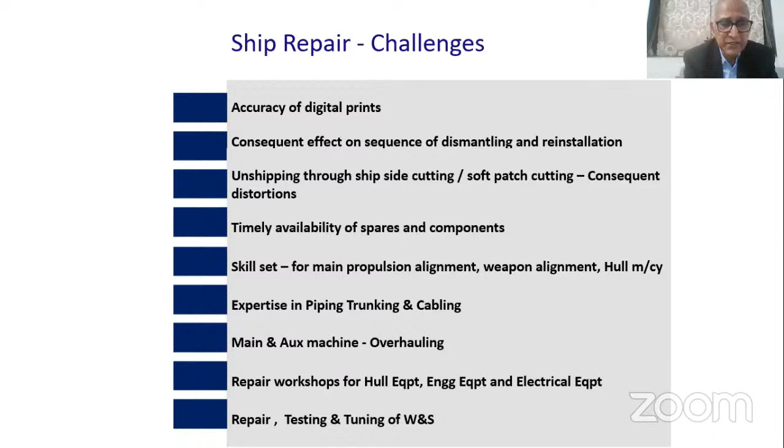Main and auxiliary machinery overhauling expertise is required. Repair workshops - you need workshops which will cater for repairs of hull equipment, engineering equipment, and electrical equipment. You must also have testing and tuning facilities. Even for weapons and sensors, you need to gear up with your own workshops and labs. Creation of testing facility, particularly for high pressure areas, underwater hull testing, hull equipment testing, electrical equipment testing - you need to cater for these testing facilities.

When it comes to shafting, if there is a requirement of true-ness checks, yes, you need to have facility for that. Balancing of propellers, static and dynamic balancing facility you should have. ICCP facility you must have, cathodic protection.

Then system buttoning and system integration - it's again a specific skill set required to be taken forward, because this is the last phase in any kind of ship repair. Onboard pressure testing, that is air pressure testing and hydraulic pressure, is a big challenge. And finally, cold checks and hot checks will have to be done for energizing the system.

Solutions - I've put down a couple of solutions which came to mind. Obtain digital footprint of machinery and systems after the pre-refit trials are over. Accuracy is very important here. Based upon the defects, you need to decide the sequencing of dismantling that needs to be ascertained. You can adopt the principle of first out and last in. For major equipment overhaul, you need to pull out major equipment from the ship and send it across to OEM.

That may come into the critical path because the equipment has to travel to the OEM premises. OEM has to do a major overhaul, its own FATs, and the equipment has to travel back to the ship to be installed, and the soft patch or ship side patch has to be welded. So in order to avoid that coming into the critical path, you need to pull out the major equipment and send it to OEM.

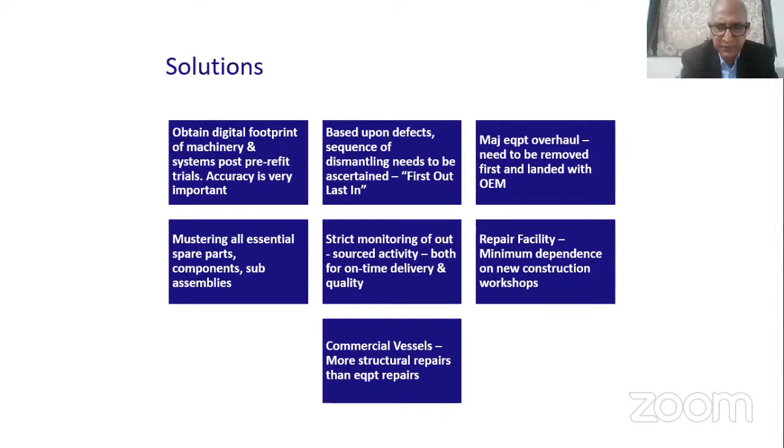Continuous training of workers and supervisors - needless to emphasize on this. Training needs to be a continuous process. You also need a facility for dust-free environment for weapons, sensors, electrical components, and high-pressure systems. System integration, as I mentioned, I'm re-emphasizing - it's very critical, and that is where we have stumbling blocks.

Cold checks and hot checks can always be done in parallel. DG trials and hull equipment trials can also be done in parallel with main propulsion assembly, thereby reducing your cycle time for repairs.

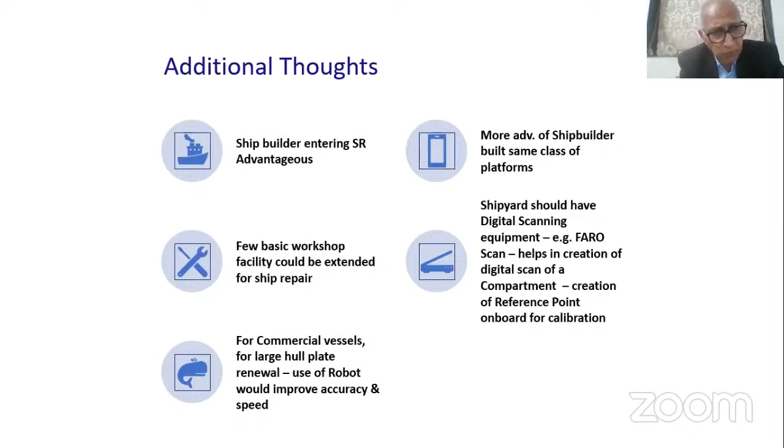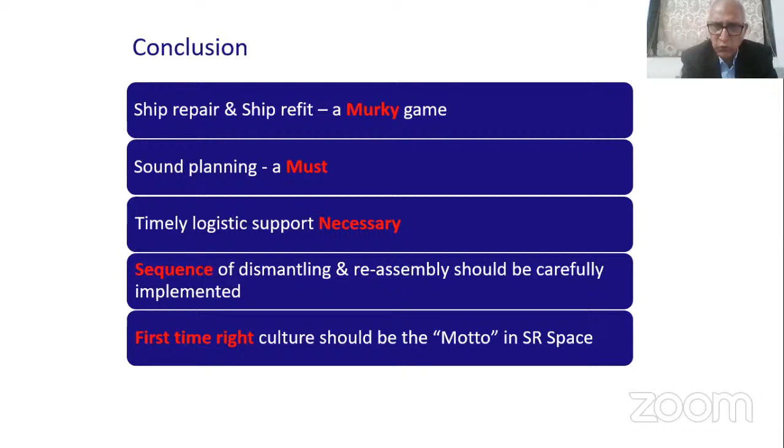I have finished, and I think I've taken a little extra time than our stipulated finishing of 8:30.